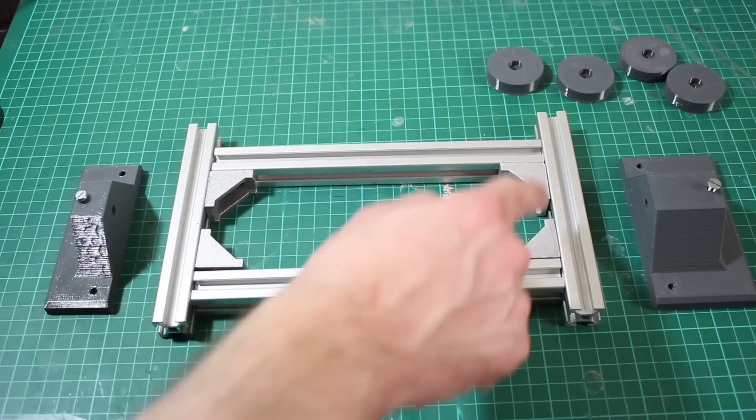I built this project out of 3D prints and Aluminium 2020 extrusion, which makes it easy to reconfigure and change as we go without printing massive parts of it. All of these brackets are 3D printed, some ABS and some colorFabb HT, which offers really good layer bonding and is incredibly tough.

So we have the ability for the legs to rotate on these bearings - have a look at last time for that. Those are locked for now until we put an actuator in, but the rest of this has lead screws and drill motors which are going to drive the joints, and that should make it quite rigid.

There is a bit of wobble in this at the moment, and I discussed improving those actuators last time by putting extra nuts in, possibly putting linear rails on. It may be we get rid of those motors altogether and do something else, but we can easily change those out as we go. So I'm going to make a few small refinements this time, and then we're going to look at building up the upper body and mounting some electronics.

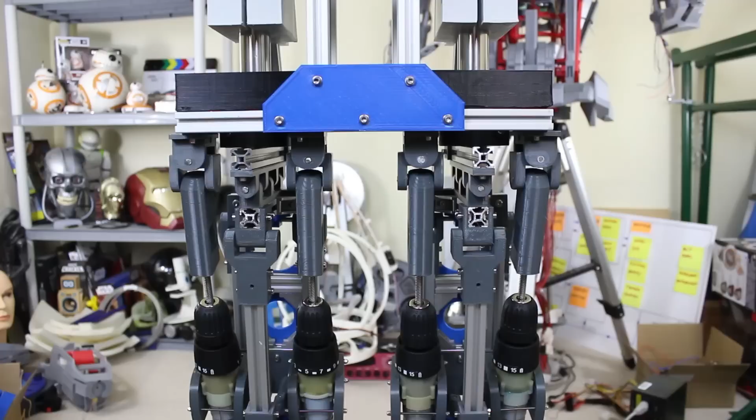I've got one minor change to make to this really, which is to move these actuators closer together at the top, because that'll give better angle on the leg there to brace the legs apart so they don't flop together as much. There is still some play in these actuators.

I'm still waiting for the extra nuts to arrive, so I can put 2 nuts for that lead screw to screw into, which should make it less wobbly, but those are shipping from China and I don't have them yet. The top ones aren't too bad in all fairness, it's the ankles really that are suffering, and I'm hoping with that extra bracing that'll just make those legs a bit more stable.

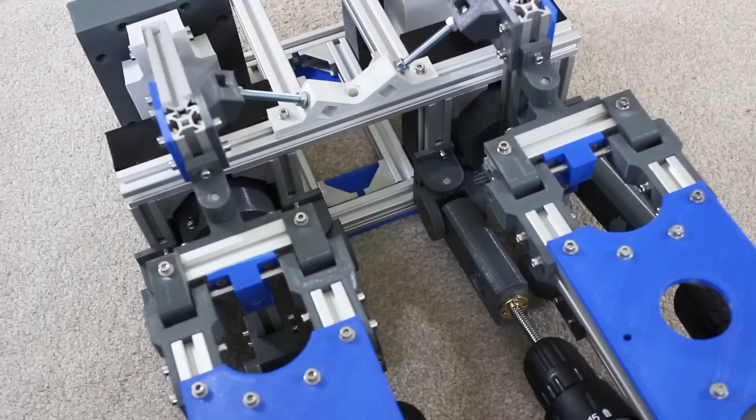I can make that change pretty easily just by sliding these bits of aluminium extrusion closer together. Those on right angle brackets on the inside here - hopefully you can just see that corner one, there's another one there. So we can undo those and just literally slide the aluminium closer to each other, and that will change the angle.

I may well turn these around. I don't know if you can see that the actual nut holding it there and the bolt is off centre, so I'll turn them round so they're closer together in the middle, and that means this is less likely to twist, because the angle will be pushing it kind of across in the same direction.

We also need to make a piece to fit on top of these to stop them just swivelling, and that will be part of the battery holder, which I believe is going to go in this section in the future.

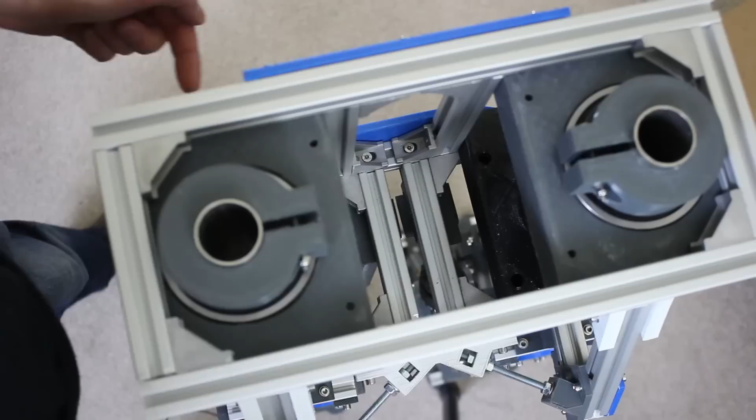I've moved these closer together, but all that's holding them is these corner brackets I mentioned, and that means they could still rotate. So I've made a plate to fit over that, which I'm going to bolt down to hopefully stop it rotating. It'll also give a bottom to this, so if I put batteries in, they don't fall through.

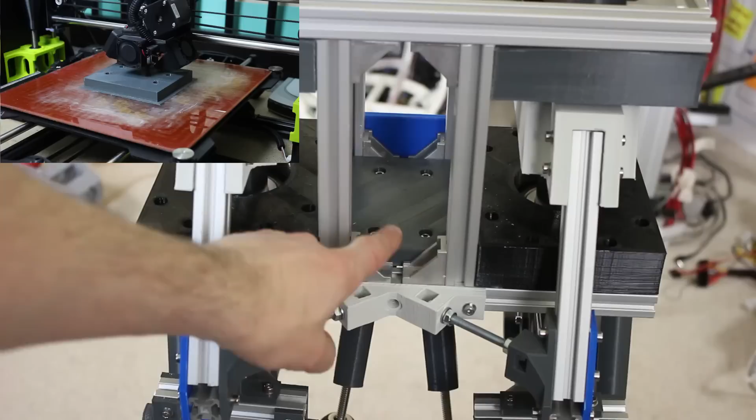Here it is, it's bolted on with 4 socket caps and the drop-in T-nuts, so that should hold those pieces of aluminium nice and rigid.

My actuators now face in, which gives quite a lot more cross-bracing, so this is a lot more rigid. I do have a slight squeak over here somewhere - I need to put some more lithium grease in that joint. But now my legs tend not to sag so much when I put load on the other one. Of course there is a bit this way because the actuators are still loose, but when they're braced together this gives me a much better structure.

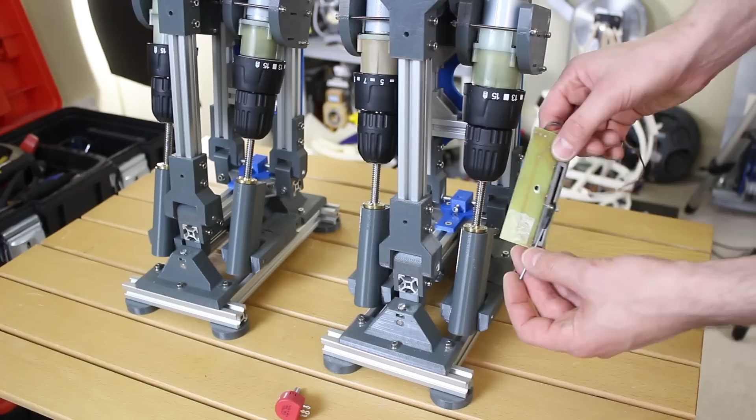So it's time to build in some sort of way of reading the feedback on the joints here so we can control the positions, and a few people have asked me about this and suggested perhaps I use linear slide pots like this one. It's a bit like a fader on a mixing desk. This is from a very old project, sort of mounted on here somewhere, and as the linear actuators pull in and out, then that will measure the position. But in fact I'm not actually going to put the feedback on these actuators at all.

I'm going to put it on the actual joints, using a pot like this, a heavy duty wire wound rotary pot. I'll put one on the axis that tilts sideways, and another on the axis that tilts forward and backwards, which will probably live inside the leg on a crank like it did on the Gonk droid.

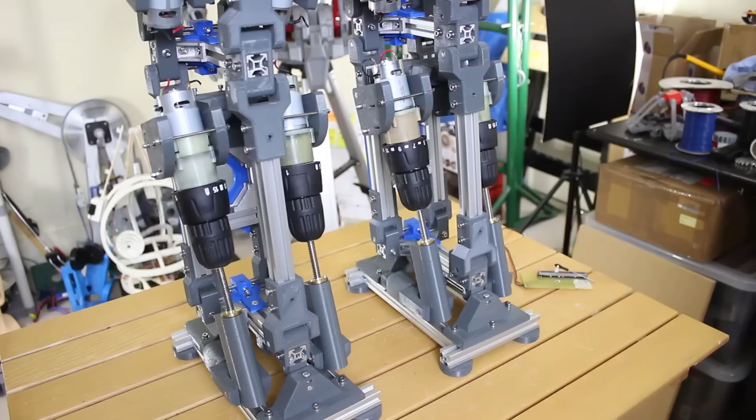So what we'll end up with is 2 PID controllers. One uses this pot, and that basically adds the value to both actuators and subtracts it to move the other way, so both push and pull the leg backwards in relation to the required position on this pot.

And that's all well and good. But obviously we've got the other one at this angle, so that PID controller has to subtract the number from one actuator and add it to the other, giving a push and pull effect.

This is all going to work out well, because if we need to move the leg forward and backwards, even if these motors aren't matched, we drive both in one direction, but if one is faster than the other, it starts to tilt the leg over. The PID controller, still running and adjusting motor speed 50 or 100 times a second, will say there's an error, so it speeds up one and slows the other down to correct it.

So this will still move forward and backwards dead straight, and we could modify the demand position on either PID controller, and the motors will move accordingly by mixing the outputs of the 2 PID controllers to get the total motion for the leg.

And that way I don't need to work out any trigonometry. If I measure the actual linear thing here, I'd have to start working out trigonometry to get the actual axis where I want. But if I put the feedback on those axes, I can just drive that demand position and everything else will take care of itself.

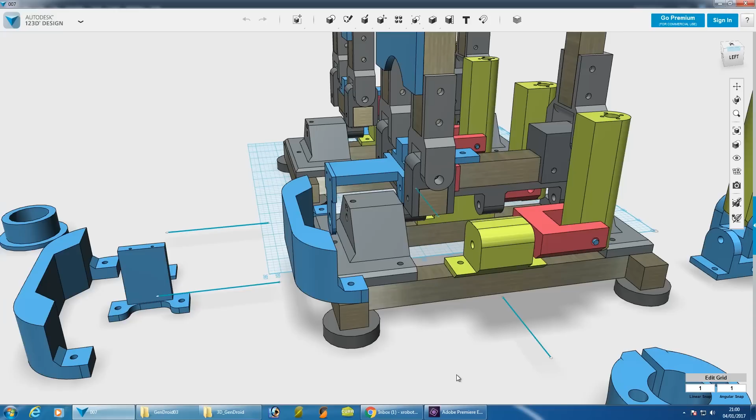So I've planned some brackets to hold my pot here. What I'm actually going to do is stick the shaft of the pot where the axle comes through, because this piece is really wide — if I'd planned this I'd probably have planned a cutaway for the pot. We've got a captive nut and a bolt holding that shaft at the moment, but it's secure enough since it's held at the back and front, and this piece is extremely rigid. So we'll push the shaft back, shove the pot shaft in there instead, and screw it down.

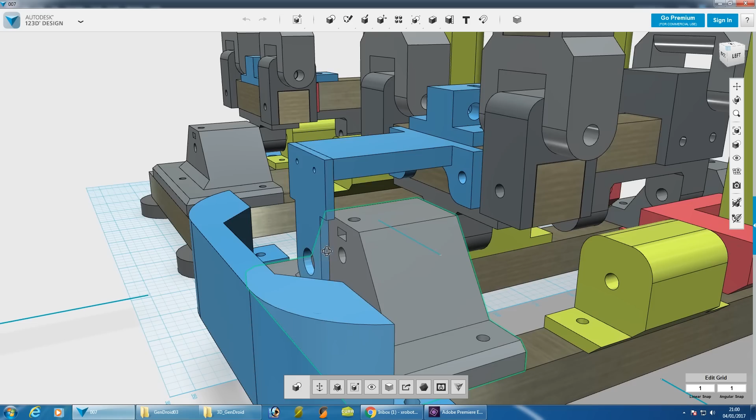And then I've got this bracket held on the piece that rotates, which holds the pot body. I've also designed this bumper on the front so it doesn't knock the pot and damage it. We may need to put some other stuff on the front of the foot, but that'll do for now. Hopefully it doesn't look too weird.

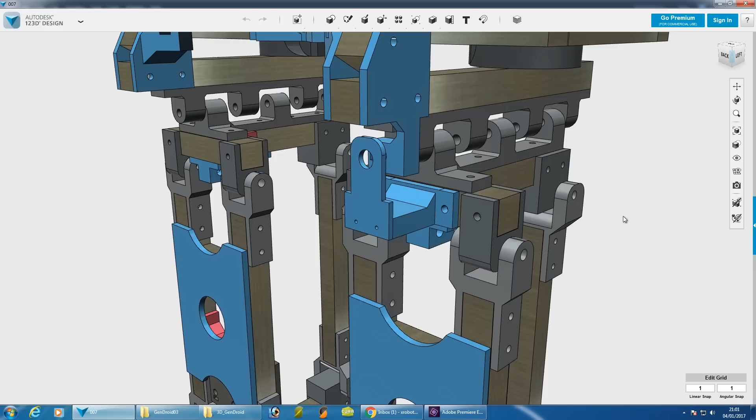At the top of the leg we've got a similar setup, so there's a holder for the pot body, and I've brought this bracket down, again with a captive nut to hold that pot shaft in line. So we'll get those printed and see how they fit.

Here comes one of my bumpers. It's about halfway done, printed in colorFabb HT, and we're about an hour and 20 minutes in.

Here comes some of my pot brackets. These shouldn't take too long, but there is one really tall part on them.

Right, so I've pushed the shaft back about 20mm, and I've got my pot mounted in its pot holder. That will just go in there and screw onto the aluminium extrusion. As the foot rotates about that axis, the shaft will be gripped in there and the pot will turn, and I can measure the position.

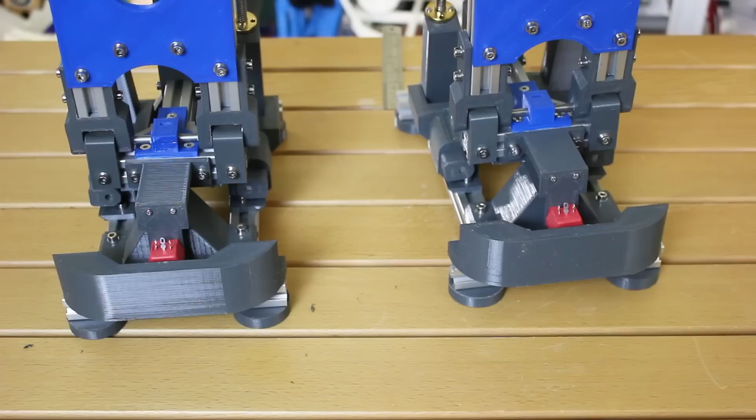Right, that's both of those installed, along with these stylish bumpers I made, which I think look rather good. Here are the top ones, which are very similar.

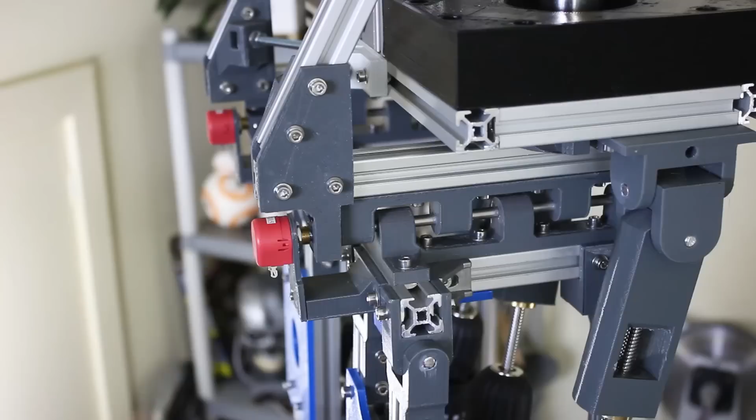So we've got the pot constrained in there. Then we've got this thing with the grub screw again, which fits on there, and that measures rotation at that point. Here it is installed, so it measures the rotation of the top point against the bottom point around that axis. So we've got 4 pots installed now that measure leaning side to side around those ankle and hip positions, but now we need to measure the leg going back to front.

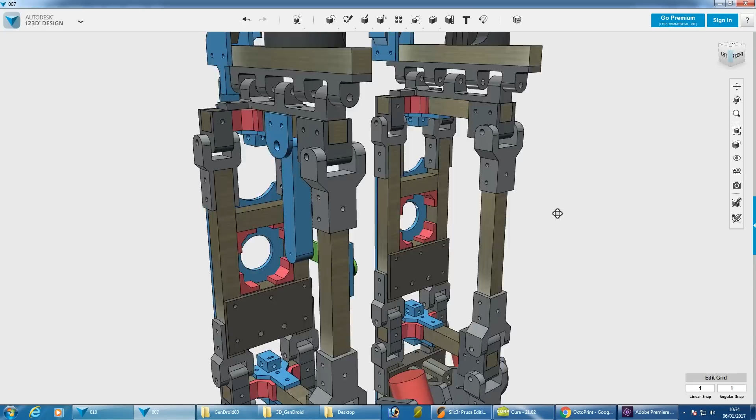And since they're parallelograms, they're actually all the same angle. So what I've done is put this piece in here, which mirrors that angle, because I don't really want to stick the pot on because it will clash with the motors. There's nowhere really for it to go in line with the actual joint, other than sticking right out the outside. So we're going to make this thing that's in line with the same angles, and it measures the same angle around this point.

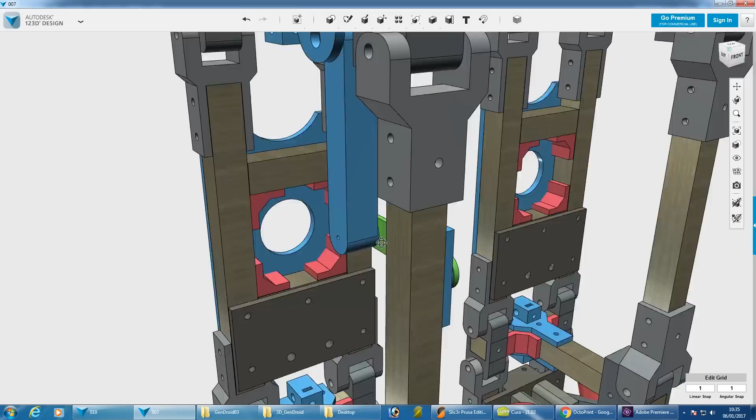So our pot mounts on there, and we've got this arm with a crank that comes down, and all of these hinge points are exactly in line to make a perfect square. So as this parallelogram moves, this will mirror the same angle.

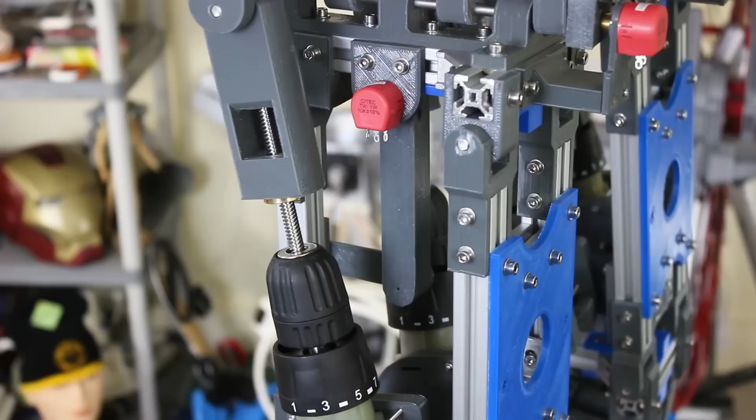Here's one of them. So now I have another 4, or another 3 to make, so I've got 4 in total. I fitted all 4 of them, so they go across that angle there, following that parallelogram angle. There's one of the ankle ones, so now I have 4 of those altogether and 8 feedback pots in total.

But now it's time to think about what goes on top. I decided first of all I'd plan where the various features go, mainly the shoulders on top. So I drew a stick man on top here, and basically its waist point, about where those pots are we just fitted, are exactly in the middle there.

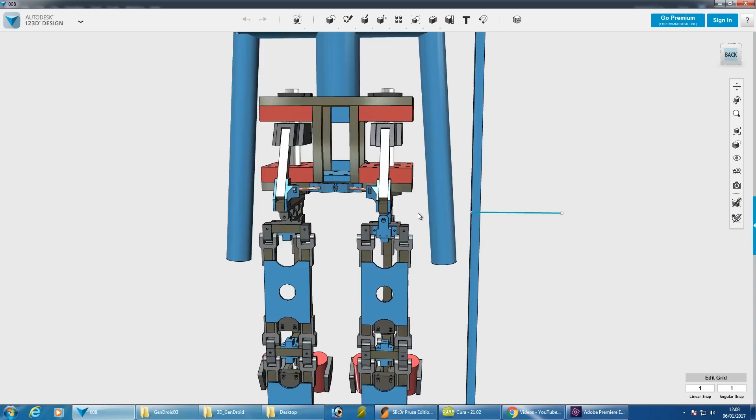So that's exactly half the height of the whole thing, and the thing is coming out at just over 1.5 meters, so pushing 5 feet tall, which was the original plan. So I think that's about the right proportions.

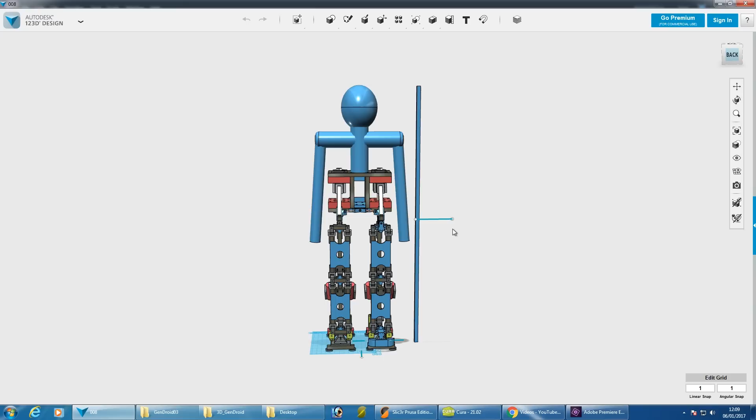Obviously the head and the arms and things will change depending on what character I build on top of it, and the plan is to make that different in lots of little mini series. So I've kept this blue bar at the same point of the shoulders there, in the same position.

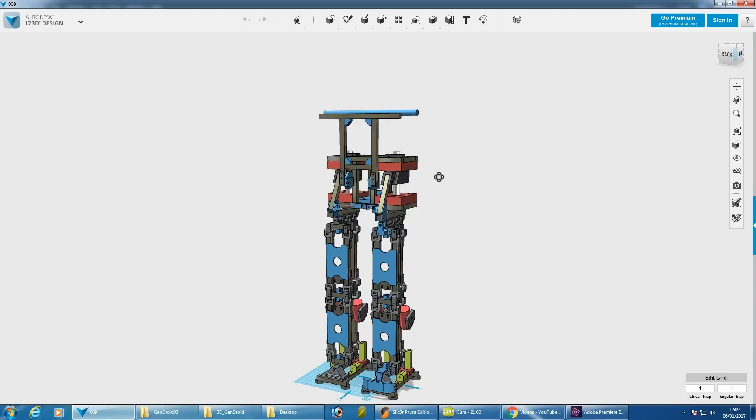So for now there'll be no arms, but basically I'm going to use this bar to put some weights on to simulate where the mechanics would be for the arms, and I can load that differently to see what the response is. So the hips are already quite heavy, but in terms of shifting around, we don't want too much weight at the top, but we do want some to simulate the rest of the body mass.

So this is also going to move backwards and forwards, so we've got an additional pivot point here. This is very similar to what I did with the Gonk droid to hold it stable front to back, which is an independent axis that will be IMU driven.

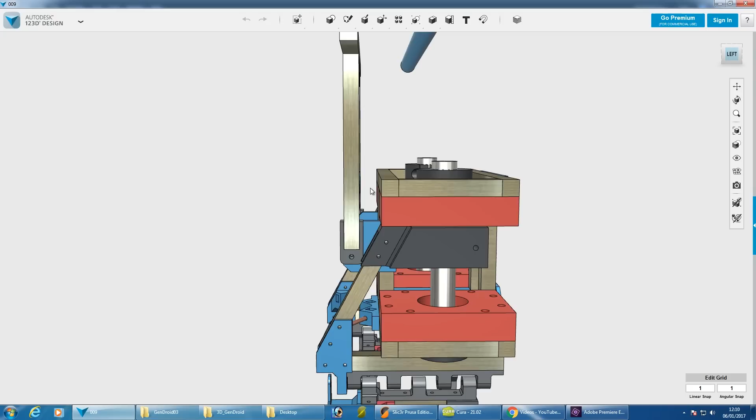So that hinges at the front. It mostly hinges forward more when it takes a step than hinging backwards. So obviously it can move right forward but not backward very much, but it can move backward a bit. And on this part we're going to build the rest of the torso, or at least a frame to hold the electronics and leave space for those shoulder motors.

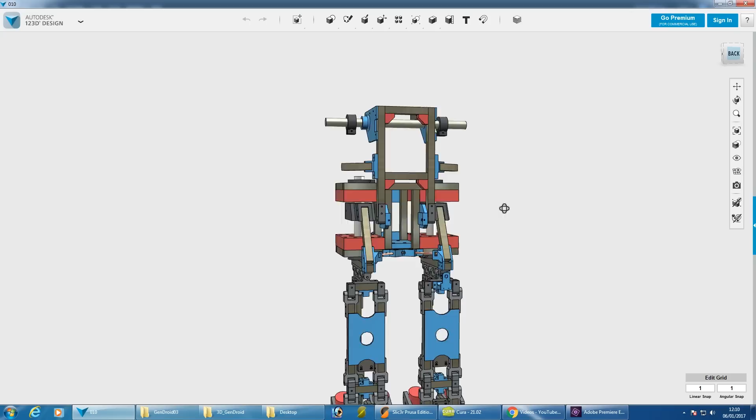This is what I have so far. So I've put a couple of brackets on here which will be kind of ribs to give that body a bit of definition there. Obviously the hips here is basically the lower torso up to probably overlapping where the rib cage would be on a human. It's quite a big thing to get that bracing in.

Check out the video last time to see why that's so deep. And I've just put a frame on the top here to hold the shoulders, so that's going to hold this bar to put some dumbbell weights on, and we've got some caps here which are going to stop them falling off, and a couple of brackets. And that's pretty much it for now.

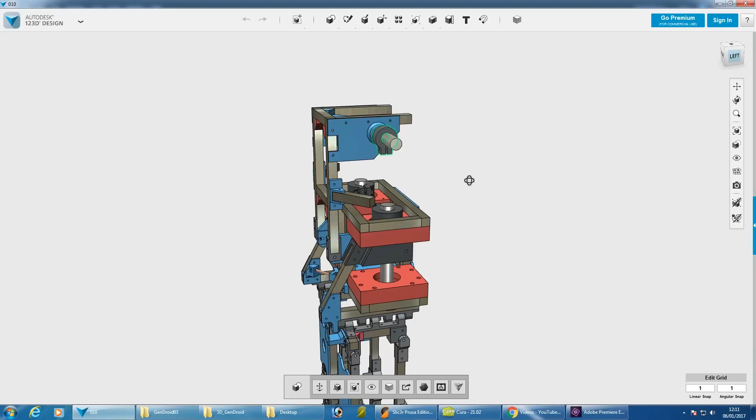We need an actuator to push that backwards and forwards, which may be up the spine or may come across. I don't know if that's a linear actuator or another 3D printed motor and gearbox like we have on Ultron, but we'll plan that a bit later. We're going to have some electronics on the front. I've left some gaps here to put a kind of cage on to protect them, so that will stick out the front to give it some chest definition, and in the back we'll have the motor drivers, and that's pretty much about it.

Here's one of my clamps that's going to hold the weights on that shaft. This is one of the main pivot points for that front axis. Got quite a way to go on that yet.

I have a number of printers all working away at once, making all the other parts.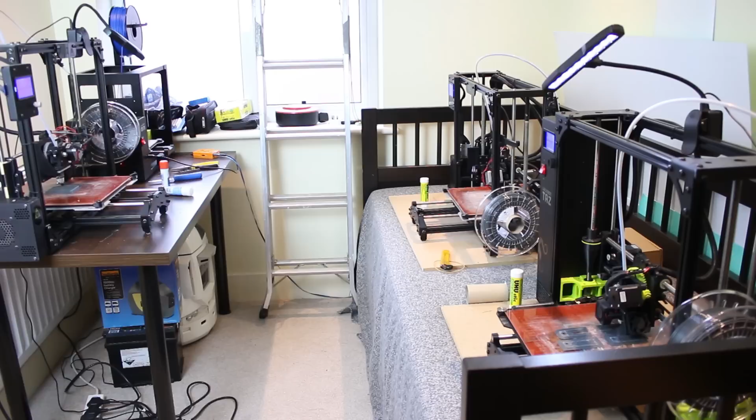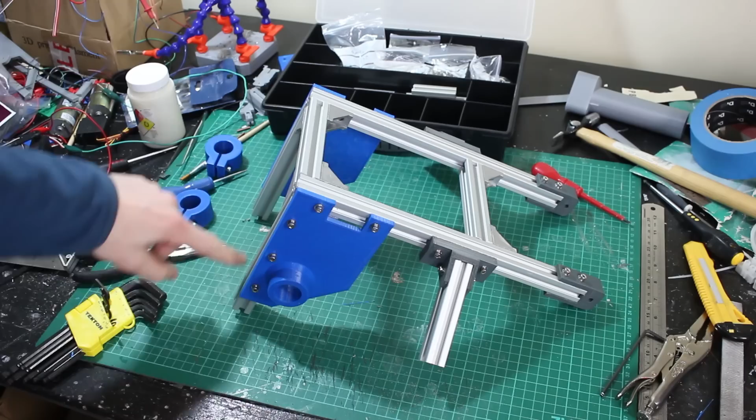Here it is, so that's ready to go on. I've got all of the bits and pieces attached, and the place there for the knee bar to go through. And I've put extra bracing on here on all four of the angles to hold this nice and rigid.

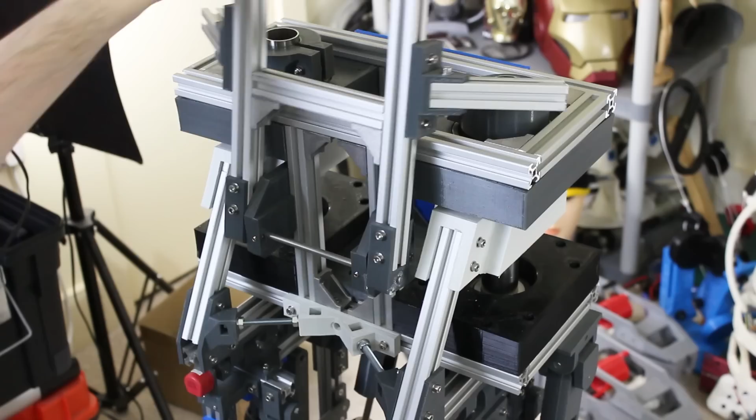Right, there's my pivot point, and I've got grub screws holding that piece of 6mm in there, so that pivots rather nicely now. The only issue is, of course, I need to get an actuator in here still to push the legs apart at some point, so I might have to cut that shaft and just have it stuck in these, or redesign the brackets, but for now that's perfectly good.

So obviously that will lean backwards and forwards with another actuator as it walks, but for now I'm going to lock it in place with a couple of brackets, so I don't have to design the actuator right now, and we can do that when we get it walking.

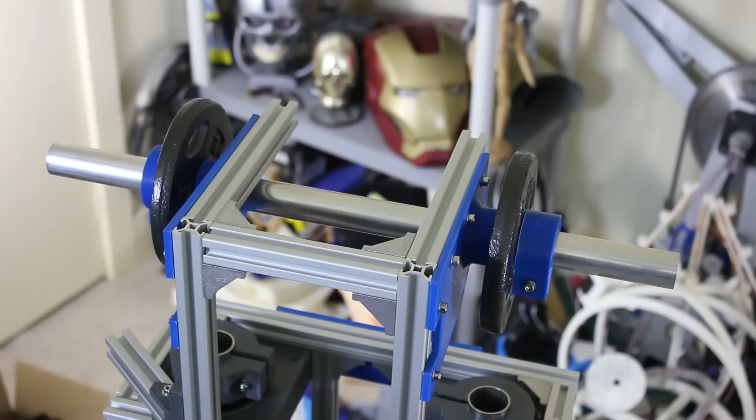For now I've just put on two 1 kilogram weights and those clamps to hold them on, but obviously I can reconfigure this so I can simulate different mass distributed throughout the body.

So here it is. Obviously the shoulders will be here, so this is just the middle of the shoulder joint. There'll be more stuff there, so I've left a gap for it with the head on top. Kind of comes up to my shoulder height, so it's pretty much the right height, and this is still feeling pretty good. I found in the past the heavier robots were more graceful because they don't move as quick.

Obviously it's quite a lot heavier than the Gonk droid, so it must be up to 25 or 26 kilograms now, especially with these weights on. But on the whole, feeling pretty happy with that. We may refine the actuators as we go, but I'm pretty sure that that's going to work okay.

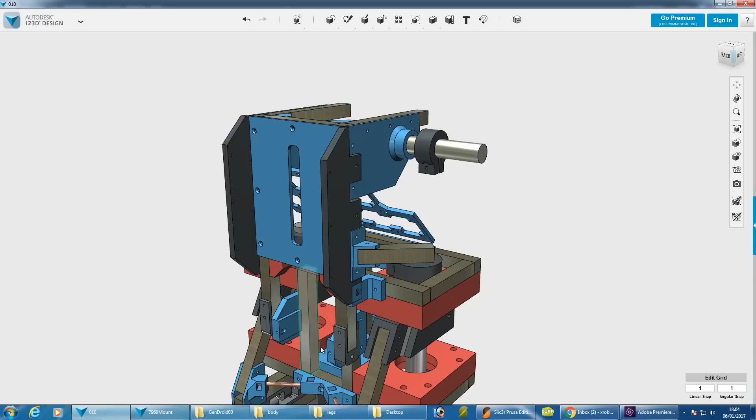So let's think about some electronics mounts. At the front we're just going to have a blue panel here with a slot in, and I'll solvent weld mounts for the various electronics, so those are in the front, and I've just made some sides here which will be in Colorfab HT, so they're nice and tough.

I've left screw holes to put a front cage on. I'm not sure if I will or whether I'll just leave them like that, so basically if it bumps into something or falls over it doesn't smash the electronics.

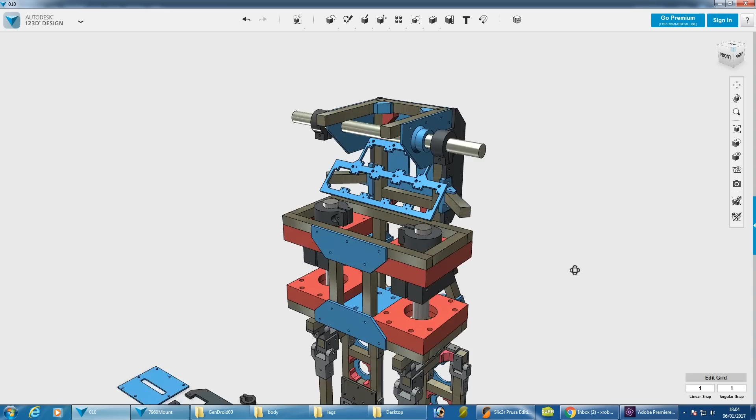In the back I'm still deciding what to do. This is for all the motor drivers. I think they're going to fit there somewhere on a bracket so I can get to them, and there's still a space there clear for the back actuator, however that works.

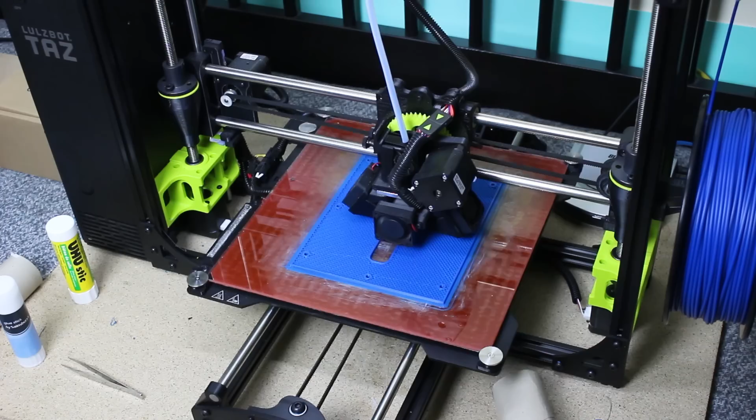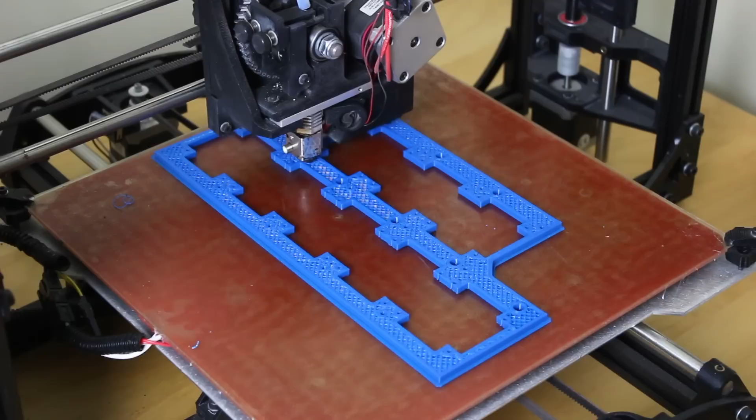Here comes my main big blue panel with the slot in. And that of course is one of the side panels. Here's that motor driver mount. We've still got some things to make to actually mount this plate, but it's looking pretty good.

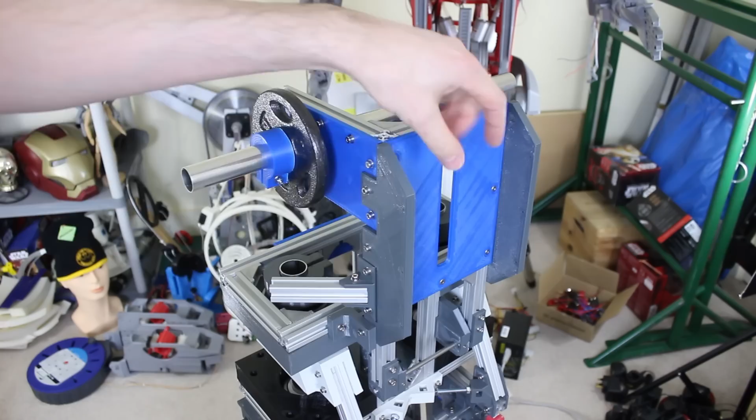Those bits and pieces are installed, so all my electronics are going to mount on there, and I'll solvent weld on some posts to screw all the boards to, and as I say, I might build a cage over the front, we'll have to see.

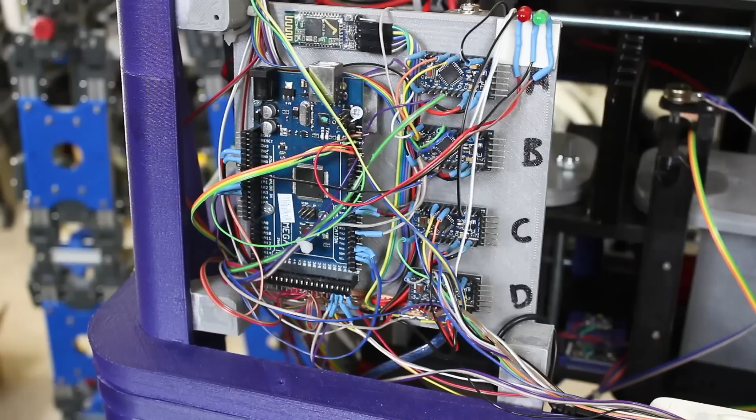And this is my motor driver board, which is going to go in the back there, and we'll have a closer look at that now, and the other electronics. You may remember from my Gonk droid build, I used lots of Arduinos to control it.

I had an Arduino Mega as the main brain there, dealing with stability, and then I had these 4 Pro Minis linked to it, each one controlling 2 motors, running the PID controllers and outputting the PWM to the 8 motor drivers. So I'm not going to do that for the new build.

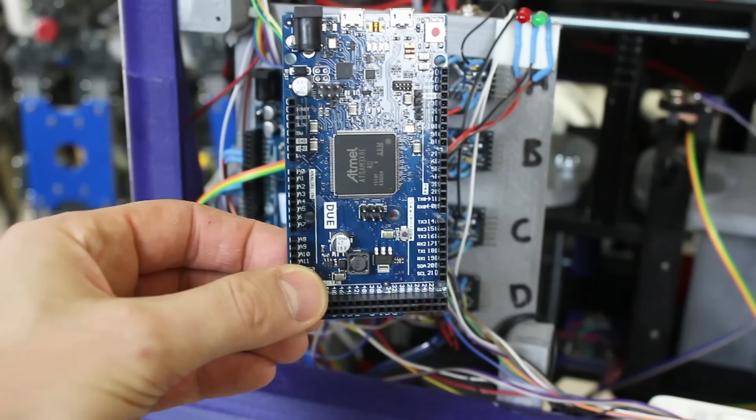I'm going to use this board, which looks very similar, but it's actually an Arduino Due, and that runs at 84 megahertz and it's 32-bit. The Mega is only 16 megahertz and 8-bit, so this should be more than fast enough and capable of running all of those PID controllers, which is good because it keeps all the variables within one program instead of having some of them back over a serial bus, which makes it hard to get motor positions back to run a state machine on the main Arduino.

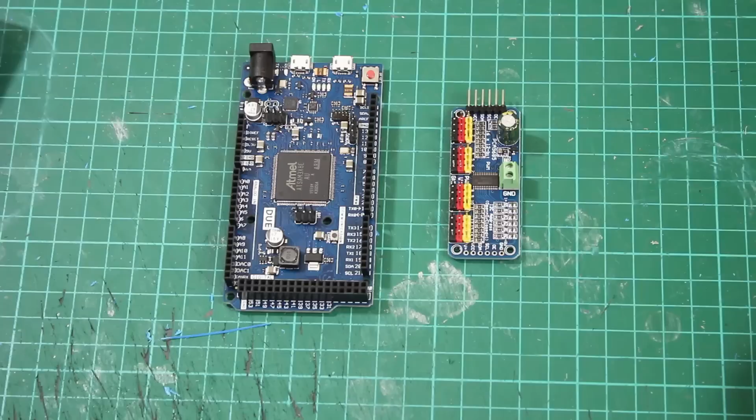So instead of having those Arduino Pro Minis dealing with all the PWM outs and all the PID controllers, we're going to run that on one board, and then use this board to hold all the PWM positions. These are basically normally sold as a servo controller, but they will do normal PWM as well, which is slightly different to servo PWM. In fact, it's much simpler to do the code to set it up, and they're quite supported.

These are a clone of an Adafruit board, so there's good library support, and it's an I2C device, so I can link a couple of wires to this from the Arduino and control all of my 16 PWMs to go to my motor driver. So here's that motor driver board again.

This is the BTS7960 IBT2 board, which you can get for about £7 each if you get them from China. There are various people who sell them in the UK and the US on eBay. These are 43 amp, 28 volt motor drivers. I use these in a lot of projects because they're quite cheap, and it takes two PWMs to drive a motor in each direction.

This is the battery in and motor out connector. You'll notice I've positioned these connectors so they're on the edge of the board, so the fat cables can come off the edge of the board.

I've also got a toggle switch on every one there, which is for the motor enable pin, so I can isolate individual motors and not have them all running when I'm setting it up, testing, or fault finding. I'm also going to have this big emergency stop button in series with all those motor enables, so if anything goes wrong I can just cut all the motors off in one go, as well as having a remote switch like I did last time.

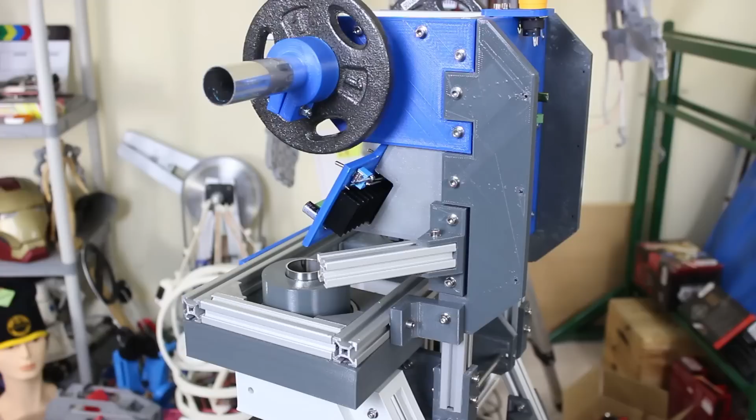I've made a bracket here which attaches that motor driver board to some of the 2020 extrusion that makes this up inside. Here it is, it seems to be mounted pretty well in there, so that should be good, and I've already wired all the toggle switches to the enable pins on the back of these boards, so those are all wired in.

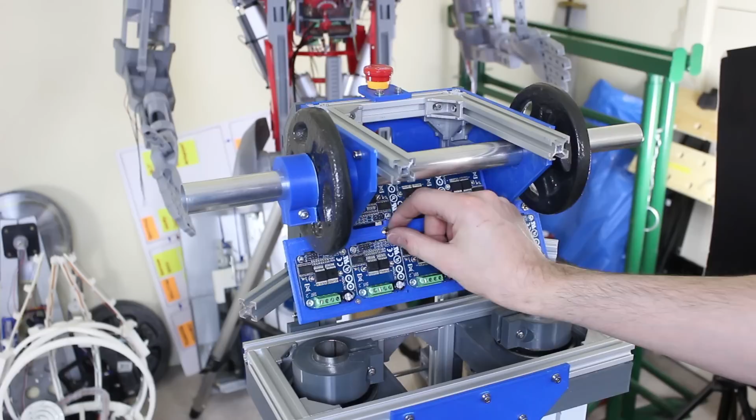I need to take one wire out and run that to my big emergency stop switch, which resets like that, and then take that out to the Arduino, so I've got my soft motor enable on the remote, but if anything goes wrong I can do this, or I can isolate motors individually.

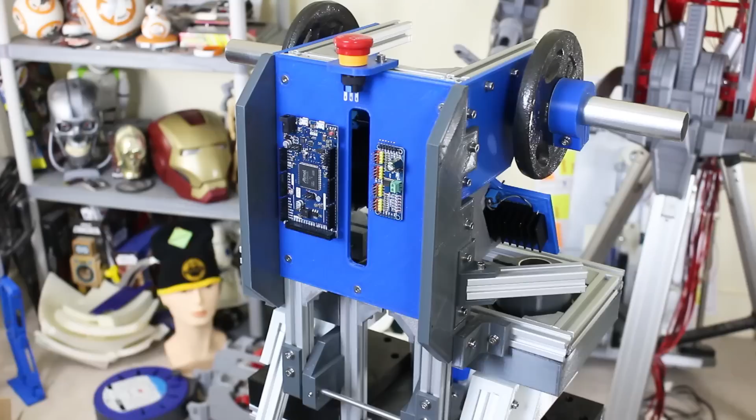Round the front I've got my two boards attached. I've solvent welded on some little standoffs for that one, and that one is just taped on. And of course I just need to run the wires for I2C to this, the PWM outs through this slot to the motor drivers. This is a 3.3 volt board, but it will actually run from 5 volts.

It's got its own onboard regulator, so somewhere I either need a 5 volt battery pack like I had in the Gonk Droid, maybe a USB boost adapter, or I'll fit another 5 volt regulator to power that. All of the motor drivers, this, and lots of the other things run on 5 volts, so we can basically power everything off 5 volts and let the Arduino regulate itself down to 3.3.

We will need some level matching, because this is a 3.3 volt I/O device and that is 5 volts. We need a level matcher for the I2C and also for some of the serial devices like the remote. But that's pretty much it. It seems to have come together quite nicely. Obviously we do have some other things to refine, but on the whole I'm pretty happy with its stability there.

Short of actually controlling it, it seems okay. It seems rigid enough. I'm hoping those actuators are strong enough, but due to its modular nature we can always change those around. We do have pairs of motors working together on every joint, either pushing and pulling or both pushing and pulling.

So I think that should be strong enough. But I just wanted to add some commentary about bigger, heavier robots. This is on the heavier side. The Gonk Droid was probably half or less of the total weight. So at the beginning of the Gonk Droid series I showed you some older robots that I built in the past, and we're just going to have a quick recap on Android 6 and Android 7.

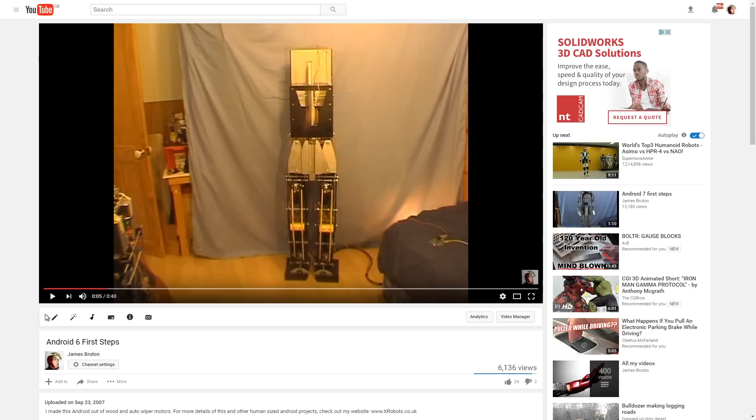So let's just see that walking along. It's got parallelogram legs again, and it's got 5 windscreen wiper motors in it. There's actually 2 in the bottoms of the legs, 2 in the tops, and 1 that makes it lean side to side, and that's in the hips.

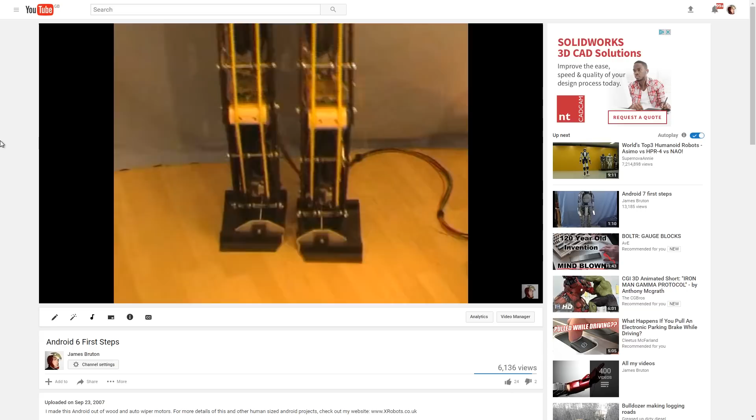Now the ankles here don't have any motors, they've just got end stops, and that's about it. So you can see from the size of that thing, it's all made of plywood, and all of the metal is studding basically with lock nuts on, so that thing weighed quite a lot.

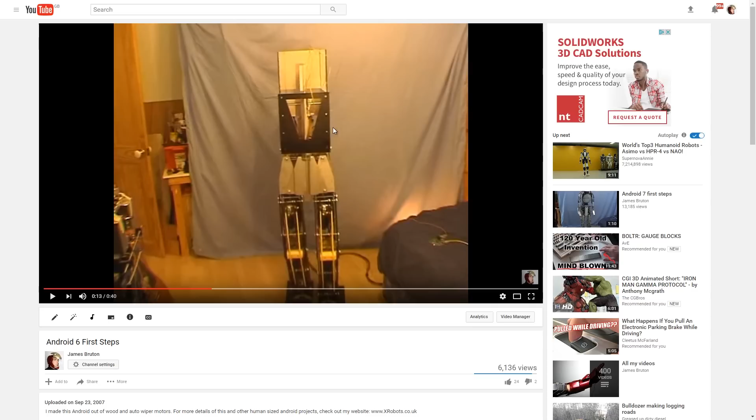And you can see it quite gracefully move side to side, even though the top swings about, because it doesn't have any independent ankle and hip motion, so it's literally shifting its mass by moving its body. So you can see that moves at a fairly slow rate and walks along fairly convincingly.

This is Android 7, which was the next one, and this walks a bit more like a human. This is what I want to get out of Robot X. So again, it's a similar size. And you can see in fact that the body swings the opposite way, so the hips swing to shift mass.

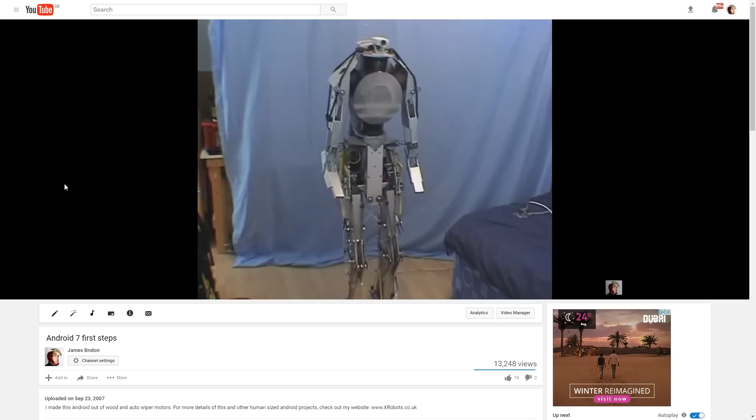This robot only had 3 motors in it, so you can probably see if we just go back a bit, these motors turning in its hips here, and those are pulling strings, pulling the parallelogram legs, and there's only 1 motor per leg. There's a lot of bungee cord in it and cords going down the legs, and again there's one in the middle that pulls strings across, shifting those hips.

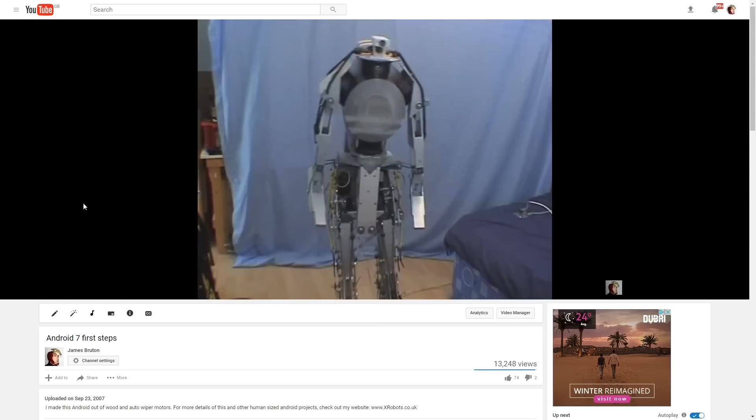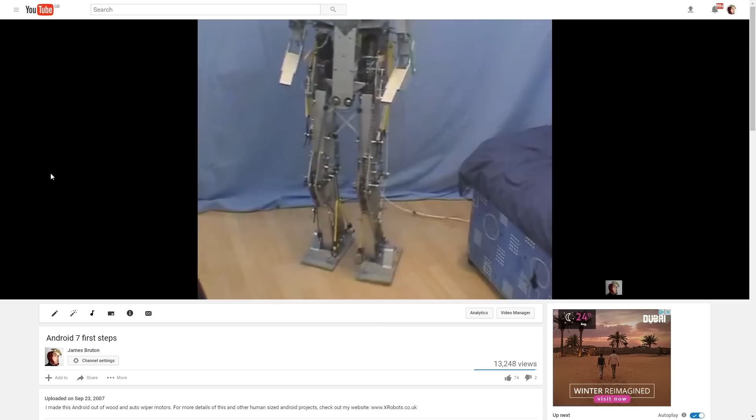I think this probably weighed more than Robot X just because it was made of, again, lots of 2x1 wood, plywood. It's also got cold rolled wrought iron in it, which was strips of basic iron I bought for making gate posts and things. So a lot of this was sort of stabilized by bungees. It had no stability. In fact, neither of them had an inertial measurement unit or any proper processing in them.

This whole thing was controlled by, I think, a QBasic program or something similar on a PC, sending data over a serial port on fixed timers, just saying to move the motors to fixed positions. Obviously there's no speed control or acceleration/deceleration control - it's on or off. In Android 6, we had 3 of these because we had 5 motors, and this system would control up to 8 motors. So we had quite a lot of relays clicking around as the thing was walking along, and that's how they worked.